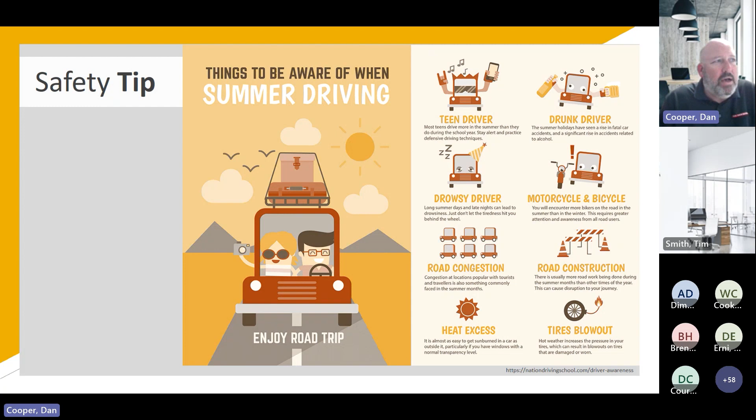Hey, good morning everyone. I'm going to share my screen. All right, I assume everyone can see my screen. Good.

Good morning everyone, I'm Soumya Balusu with SCS Engineers, and along with my colleague here, Shashank, we'll be talking to you about landfill closure. So a little brief intro for me and Shashank.

I'll let him go here in a second. I've been with SCS for about 6 years, and I've been in the solid waste industry for close to 18 years. A little fun fact about me is I practice the other side of my brain, separate from engineering. I've practiced Indian classical dance and performed since the age of 7.

I'll let Shashank go here with a little introduction, and I'll take back over. Hey, good morning everyone, I'm Shashank. I work out of the Atlanta office for SCS. I've been here for 5 years, 6+ years in solid waste. A little fun fact, I play soccer, I coach soccer for the past 2 years, and shout out to any Arsenal fans out there.

Going over our agenda here, I'll be doing the first couple of slides, and Shashank's going to do the bulk of the presentation. We'll go over closure, an overview, what triggers it, typical types of capping systems, and then we'll talk about what to plan for when designing a closure, some considerations for leachate and landfill gas as you prep for closure. Think about construction and bidding, material costs that are all over the place these days, and of course plan for contingencies. Then we'll wrap it all up in our conclusion slide in terms of the takeaways for the preparations for closure.

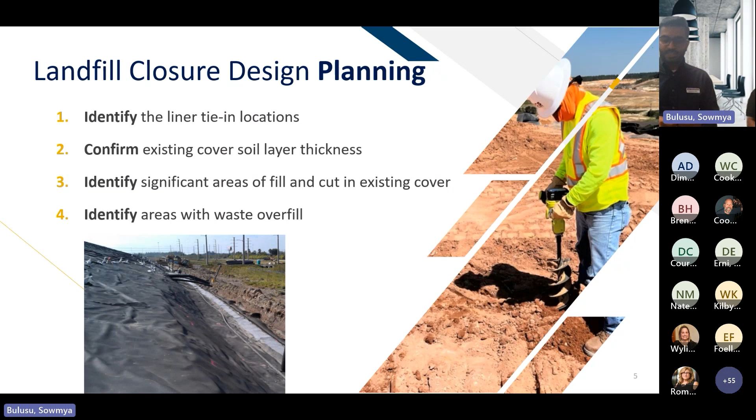Going on, leachate considerations. Being in the Southeast, none of us are immune from rain. Is this site a wet site? Identify and flag any existing leachate outbreaks. Make a plan of tackling those as part of your closure design, and then address them with multiple options out there: toe drains, French drains, or any vertical sumps you may have to look into incorporating in your design.

Stormwater considerations, that's the biggest challenge with closure, and we'll go more into the rainy season on that. Need to look into how much fill will be needed on your benches, evaluate slope on the benches so the stormwater design will work, and show more details on your stormwater outlets daylighting.

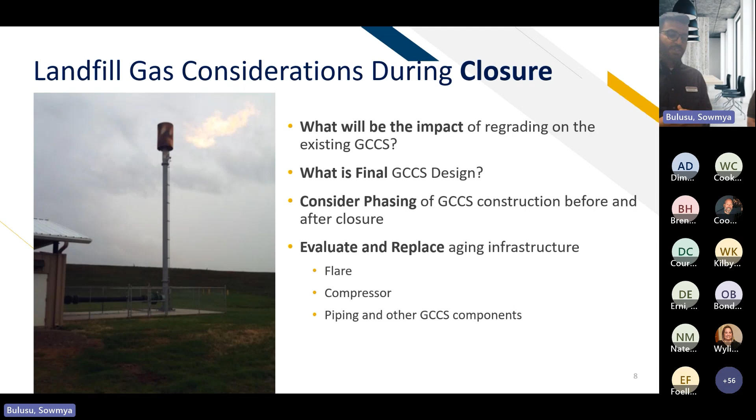So what would make sense is bidding during the rainy season, planning during the rainy season, so you don't have boots on ground, heavy equipment contractors sitting out there waiting to ride out the rain event, or reworking the slopes with soil washing down. So bid during rainy season, stage your construction more for the dry season.

Typically, we want to look at a 20-25 acre closure area to avoid interaction with the rainy season. And as I mentioned, during rainy season you can do all the initial legwork: shop drawing reviews, material procurement, conformance testing, and material delivery.

Material cost—obviously you're looking into closure. Cost is going to be the bigger driver here. Costs are ever changing, and material prices are rising each day. Geosynthetics have gone up by anywhere between 100 to 300% in the last year or so.

So a few things to evaluate in this situation. If you have enough time on hand, and the owner—whether it's the county or a private owner—wants to look into buying the material, what that would do is save you a 15 to 20% markup, which the contractor typically has. But if you're looking into that, you invite added responsibility on the owner side, which is getting the material, unloading it, and storing it in the right location. Geomembrane stores outside pretty well with some cover on it, but you may want to look into storage for geotextile and GCL, which are susceptible to moisture and UV.

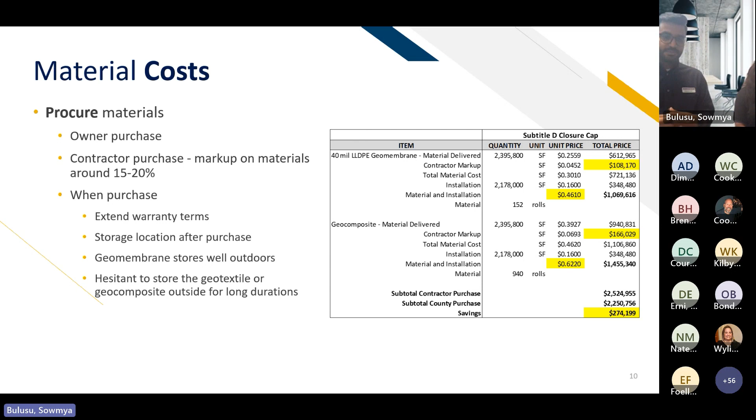Strategies for low bids: more definition in plans will always help. Having a more defined design with more details and call-outs, with exact locations either drawn out or in a tabular form of where you want your stormwater features or anything that specifically needs attention, means it doesn't need to be figured out during construction, because at that point things move too fast. Chances of failure are significant in those situations.

More breakdown in your bid forms—again, we don't want a 1,000 line item bid form, but breaking it down will help mitigate risk. And then contractor pre-qualification: while going through the design phase, you can work with purchasing to start pre-qualifying your contractor, so you don't have to worry about who you're dealing with when the bids come in.

Now, planning for contingencies. You can plan everything, but there will always be contingencies during these big major construction events—leachate outbreaks being one of them. With soil moving in, heavy equipment moving around, and waste consolidation, there will be spots with wet areas or leachate outbreaks, so have extra details in place for issues like that.

Raising your GCCS components—soil will be moved in before and after the liner, so you have multiple events where the stub-up will be at multiple heights. And if you have an ongoing monitoring schedule, you have to evaluate that to maintain compliance requirements as well as to keep the contractor moving.

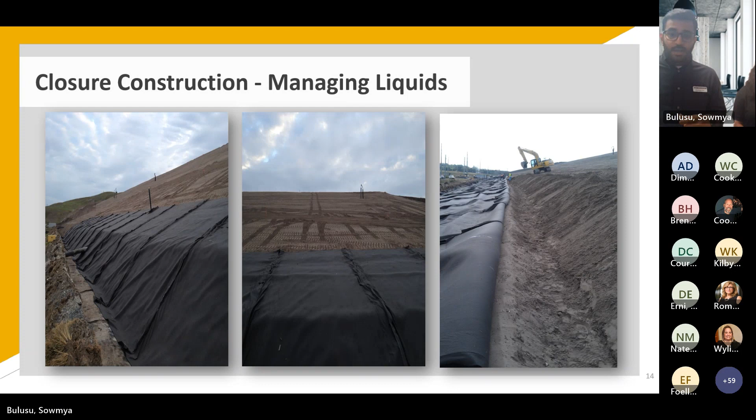In the next slide, on the left picture, the geocomposite was extended upslope because they identified a wet spot or continuous leachate outbreak—extending it further up gave the leachate a pathway to flow down to the low spot. On the right picture, you can see the excavator putting in a vertical stub-up, which can be used to install a pneumatic pump or other pumping mechanism to extract liquids and prevent them from accumulating at the toe of the slope.

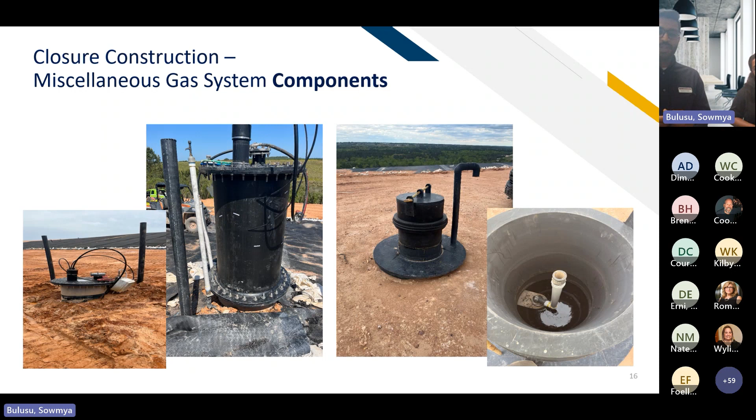And on the right, you can see an air release valve in a vault box, and rather than raising the entire component, they just decided to raise the stub up for that with a PVC pipe.

So overall, preparations for your closure, as we went through this presentation, thinking of closure, what can you do right now before you actually go into construction or in a design phase? Look into your tie-in locations, evaluate if you need to come up with what area you're looking for, for either a partial or a complete closure.

Your GCCS evaluation, evaluating your existing as well as your final needs, managing liquid outbreaks, soil cover depths to confirm that you're meeting your permit requirements.

And then talk to regulators. As we mentioned earlier, if you have areas of waste relocation or anything like that, see if the regulators are willing to look into a plan, or if not, then what are the other options? And then strategizing with your purchasing.

With that, we conclude our presentation.

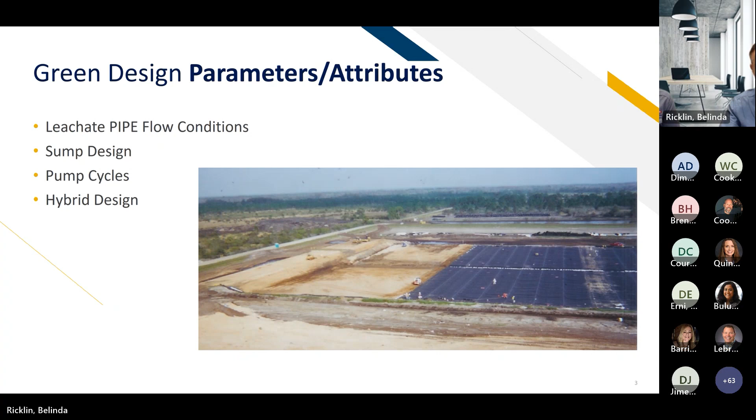Versus the slope, which will give us some ideas how to maximize the green design of the cell. Pipe flow condition in the green design: the pipe flows under submerged condition, which will provide the flow to be maximum within the pipe dimension, 8-inch. Usually we use 8-inch pipe.

In the herringbone design, the flow strictly flows by gravity, which provides much less flow capacity than the maximum that can be carried through the pipe. For example, if we have an 8-inch pipe at a slope of 0.35%, the maximum flow, or the full flow capacity of that pipe, is 470 gallons per minute.

Where does that come from? If we look at the Driscopipe design manual, it gives the capacity of the pipe, full flow capacity of the pipe, based on the slope. The x-axis here shows the slope of the pipe, and the y-axis is the dimension, diameter of the pipe. So if we look at roughly 0.35% slope of the pipe, the 8-inch pipe can give us about 470 gallons per minute.

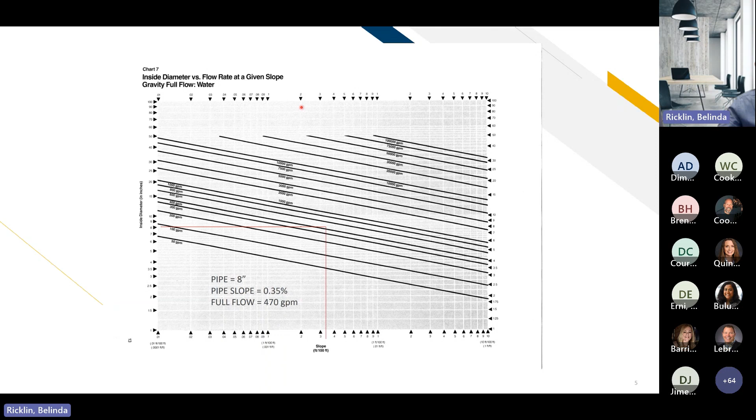Now, this is for water flows. I know we're dealing with leachate, which is different than water. However, this will give us an idea that we have much more capacity in the leachate collection pipe that we can utilize.

Now, where is the pipe located under the herringbone design or the green design? In the herringbone design, if you look at this chart, the leachate pipe is laid on a grade of 0.35% or 1% or whatever the grade is, and the invert of the pipe sits at the top of the sump.

So actually, it will be discharging into the sump by gravity until the sump fills up, then the leachate will be pumped out. In the green design, the leachate collection pipe invert sits at the invert of the sump. That gives us the sump and the trench where the pipe is located becoming like one big, large sump that we can utilize to store the leachate.

So basically, this is the difference between the two design considerations. Now, it's very important that we have good settlement analysis of the cell that we design. Geotechnical information and settlement is very critical, because when you design a green cell, you're really depending on the post-settlement grades, since this controls your grades, as we will see later in the chart, how that affects it.

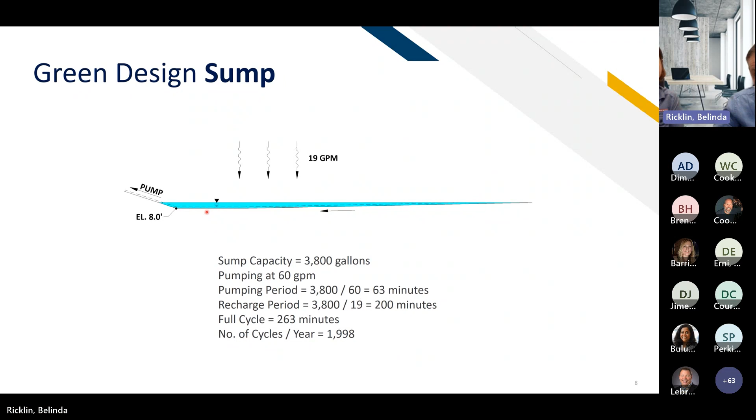So really, in summary, the herringbone design, the number of cycles per year that pumps coming on and off is about 11,680. Whereas in the green design, we have much longer cycles because of the volume of the leachate within the sump, so the cycles per year is much less, which is 1,998. Of course, this is quite a difference between the two scenarios, and this will help in reducing the maintenance cost of the pump and providing longer life for the pump. So actually, this is one of the advantages that you can get from the green design. Okay, Thomas.

Okay, so this is the fun part now. How can we determine how long our green cell design is going to be? And what are the controlling factors or parameters that we can evaluate to maximize the length of the cell?

So basically, if you look at this chart, we have the depth of the sump on the x-axis, and we have the slope of the pipe or the slope of the sump on the y-axis. As you can see, the lower the slope is, the longer the cell you're going to have. That's why post-settlement grade is very important, because 0.1% or 0.2% change in grade is going to make a difference under this design. So if we have, for instance, 0.35% slope, and we go on to design a cell 750 feet long, we know that we want to have a sump about 2.7 feet deep. That sump will have 2.7 feet deep at 0.35% post-settlement grade, giving us a length of the cell of 750.

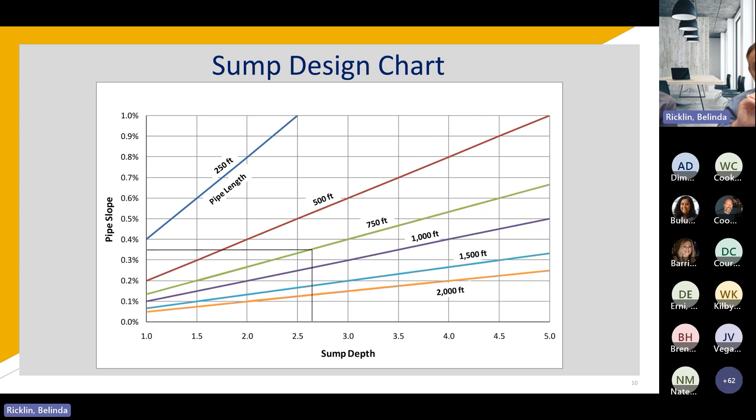So now I'll go into a few construction photos we have for cells that we've done. I think mostly through Florida, we've designed some cells like this.

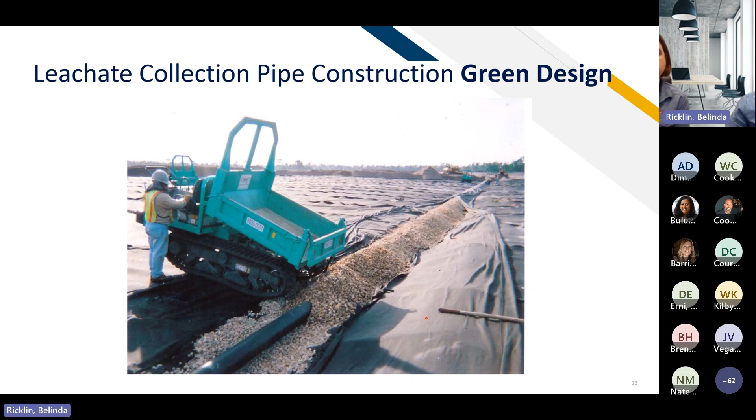To the benefits of the green design: one of the major benefits of this design is the increase in airspace compared to the herringbone design. You use a lot less structural fill to construct the cells, and a lot less fill to construct the berms around the cell, since you can have a constant elevation berm around this type of design.

This design also allows for lower head on the liner. You have a shorter calculation of the head, you can show that it is not as high with this design. And then you have your increase in the sump storage capacity that Abdul discussed, as you can see in this photo here.

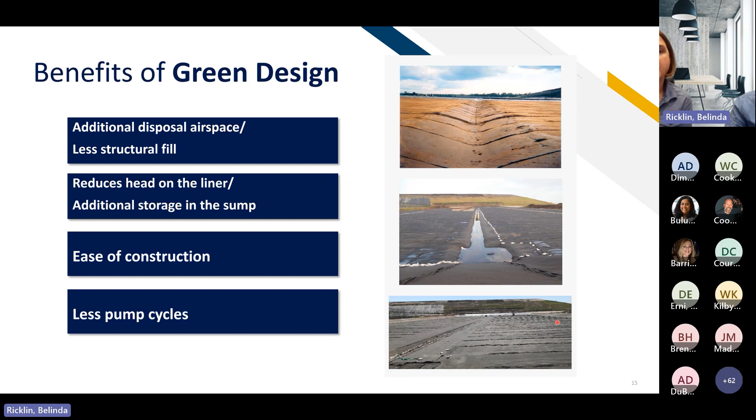And then, as Abdul shows, because of the sump capacity increase, you have less pump cycles. That extends the life of your leachate pumps, and then you can consider all the financial beneficial impacts of all these advantages. So with that, I'll take any questions.

So it looks like we got one in the chat here, so I'll go ahead and read it. It says: do you see any differences in the amount of leachate biogeochemical deposit in the LCS between the two designs?

I don't know who the question was directed to, but I don't think so. If the pumps are maintained and pumping the leachate frequently as designed, as long as the cycle is about one hour or two hour cycles, it's not going to make much difference. If it sits in the sump for a longer period of time, that will have the potential to precipitate some of the calcium carbonate—we're talking about days, maybe weeks. So if it's operating properly, I don't foresee any problem with that. But that's a valid point—if you have stagnant leachate for a long period of time, you have a large potential for creating calcium carbonate precipitate. I hope that answered the question.

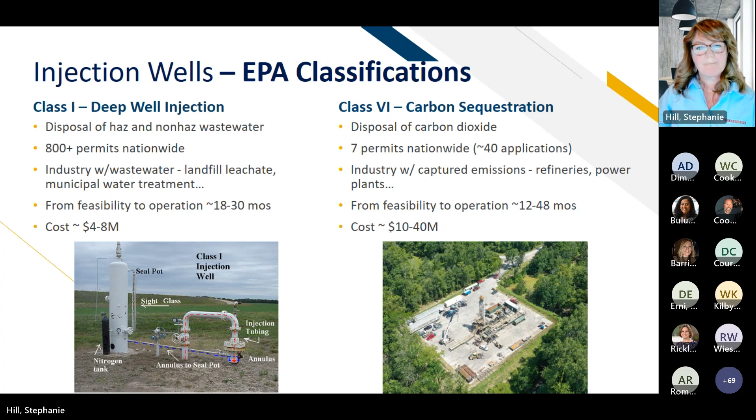Injection wells are designed to protect drinking water aquifers, and in a few minutes I'll show you how they do that. In both deep well injection and carbon sequestration projects, permanence creates certainty with operators, regulators, and communities. Permanent disposal of wastewater means it doesn't come back up; it's forever isolated from drinking water resources and surface streams. Permanent sequestration of carbon dioxide means it can't re-enter the atmosphere. Deep well injection is a residuals management option for industry seeking business certainty.

Treatment plants are tightening their belts and acceptance of certain waste streams that impact their UV filtration processes, so they're cutting off streams that contain emerging contaminants of concern. Use of deep well injection can eliminate those fluctuating treatment plant criteria and can represent significant cost savings to hauling wastewater off-site. Carbon sequestration reduces atmospheric emissions, allows high emission generating businesses to compete in global markets, and helps them reach ambitious carbon intensity goals.

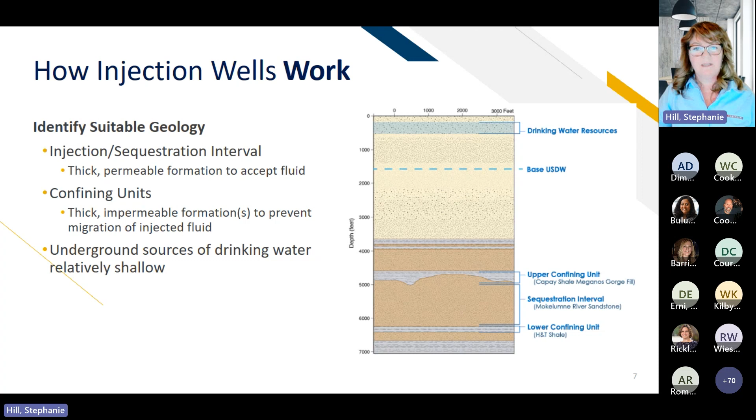And three, is there adequate vertical separation between the base of that protected drinking water aquifer and the top of the confining interval? So we're essentially looking for a confining unit or cap rock to keep those injected fluids down in the injected interval so they don't have some sort of artificial migration pathway to send that water up to the base of the underground source of drinking water.

So injection wells are installed with multiple strings of steel pipes or casing. Think of it as a set of nested toys, or a straw within a straw. Each string of steel casing is progressively smaller and it's cemented in place. This method of construction creates a redundant barrier between the injected fluid and the protected drinking water aquifers.

Requirements for continuous monitoring and frequent well tests ensure the well maintains integrity. When injection wells are sited in areas with suitable geology, when they're properly designed and installed, and when the monitoring, reporting, and testing plans are properly implemented, then injection wells can be a responsible water management option that effectively protects drinking water aquifers.

Deep well injection and carbon sequestration wells are very similar, but one difference is that deep well injection takes liquid fluid, while carbon sequestration can either take liquid fluid or supercritical fluid. I'll talk about that in just a moment.

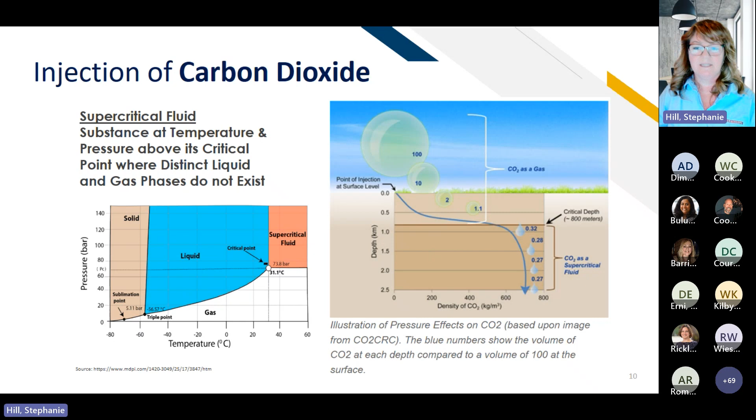So let's move to the illustration on the right now. By compressing the gas into a supercritical fluid, we effectively reduce the volume of the substance by 98%. And when we inject a supercritical fluid into a formation, we can get a lot more carbon dioxide into a smaller space.

So injection wells are installed using large drilling rigs capable of drilling through thick, competent rock and handling the anticipated weight of the steel casing.

Through a series of alternating sequences of drilling through rock, setting casing, and cementing the casing in place, two things are happening. One, of course, we're installing the injection well. And two, we're collecting site-specific data.

The data can come in the form of water samples to validate the pretreatment to ensure chemical compatibility, and rock cores to assess the pore size so we size our filtration media correctly and don't plug off the well. The last form is other geologic data to confirm appropriate set points of our casing within competent rock. Those drilling and completion activities typically take place within about 4 to 6 weeks for each well.

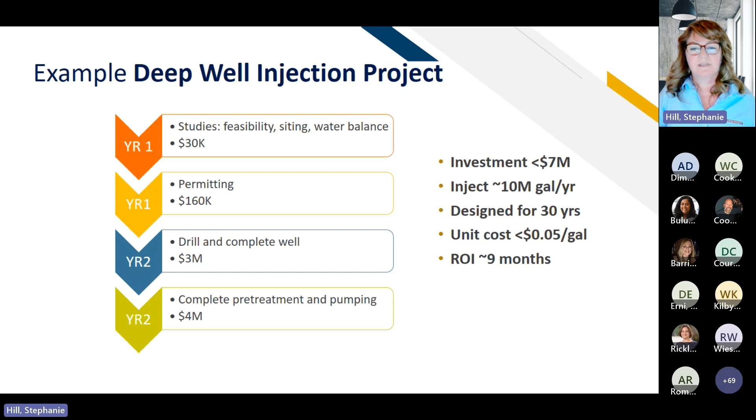That's before any sort of federal incentives offered through the Inflation Reduction Act of 2022. Although we may not have the leisure of a lot of time today to go through that, I'm happy to discuss things like the 45Q incentives, tax credits, and qualification requirements offline if you'd like to contact me.

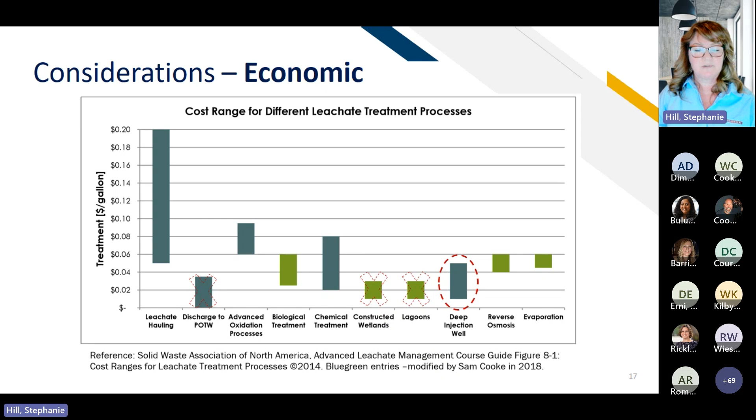So I'll provide a closing here to say that deep well technologies have been through decades of improvement, and they're strictly regulated, with redundant protective design components, continuous monitoring and testing. Injection wells are a responsible environmental management option, an EPA-supported option for permanent disposal with no residuals to have to manage. Isolating wastewater and carbon dioxide from the water we drink and the air we breathe serves to improve our environment. For businesses, use of injection well technologies provides certainty through elimination of varying water treatment requirements, and they also provide significant cost savings over hauling waste off-site.

So with that, I thank you for your time, and I think that we've got some time to answer questions before our break.

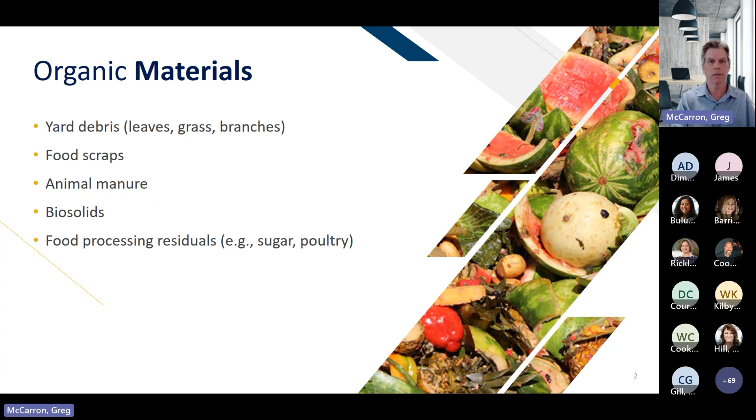The first step in any feasibility study, any look at options, is to understand what organic materials you need to manage. Here's a list of the common materials that are managed outside of a landfill or waste-to-energy facility—everything from yard debris to food scraps, biosolids, and food processing residuals of all kinds. I have a couple of examples here related to the sugar industry as well as the poultry industry. Later in this segment, Trent is going to do a deeper dive into a specific biosolids project, so I won't talk too much about biosolids. Most of what I'll talk about centers on yard debris and food scraps, but it really depends on your specific situation as to what organic materials you want to look at—not only the type of materials but also the quantity, how much material you need to manage.

Nationally, there's lots of activity with organics management, specifically diversion of food scraps from disposal—meaning from landfills and waste-to-energy facilities. The reason for that is largely regulatory driven. There are now 8 states that have some type of diversion regulation, and there are also another 7 or 8 large cities or large counties across the U.S. that have some type of diversion regulation on their own.

Just to give you some sense of what this means, California is probably the biggest one to note, in terms of their population and regulation. They've calculated that statewide they need to install about $150 to $300 million worth of capacity to handle organics. This is largely food scraps in the California regulatory scheme.

There's also lots of climate change initiatives, and organics diversion usually factors in quite heavily in what you can do to limit climate change and limit greenhouse gas emissions. And with that, there's also lots of money that's available and becoming available.

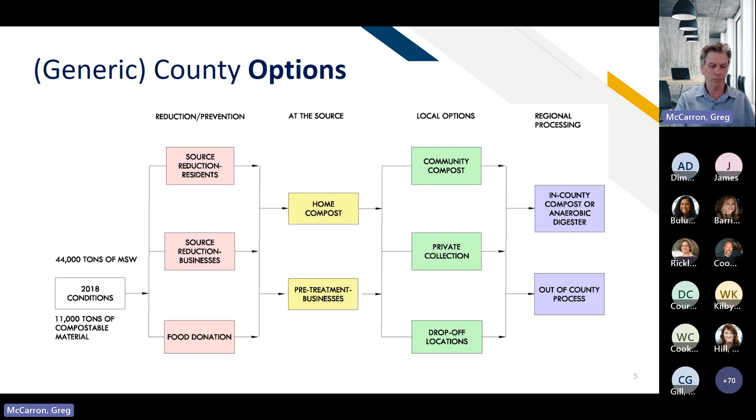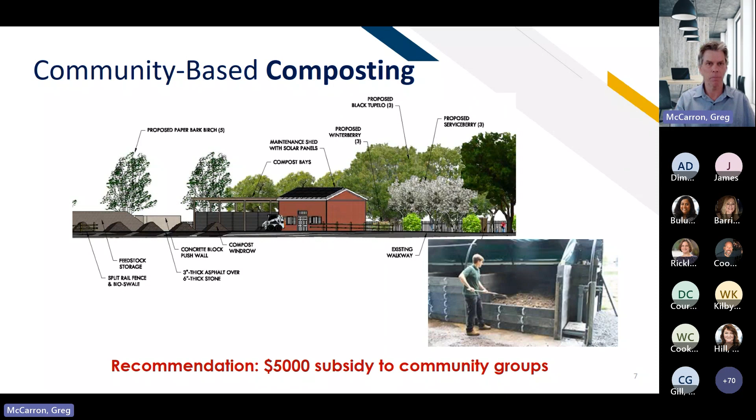On the right-hand side is St. John's University, also coincidentally in Queens, and this handles the food scraps from the university itself. Again, by way of example, in the county feasibility study we did, we suggested the county provide $5,000 subsidies to community groups if they were going to implement some type of community-based composting program.

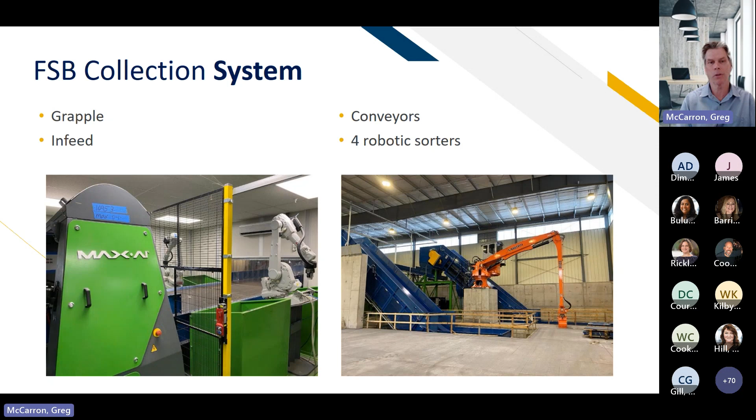So now moving off of collection and home and community-based composting, I wanted to get into more centralized facilities. So looking at compost technology, there's everything from turned windrows to aerated static piles to in-vessel or in-building systems.

What I like for process and cost efficiencies is actually a hybrid system. I'll show a couple of examples of those. That's where we're combining an ASP system at the front end, followed up with a turned windrow system.

So in all instances, before I jump into the actual photos of the facilities, there are common goals and common requirements for any kind of compost facility or anaerobic digestion facility. Number one, we need to make a high quality, consistent product. Number two, we need to comply with all regulations - typically the big ones are odor and air emissions, as well as water, contact water and stormwater.

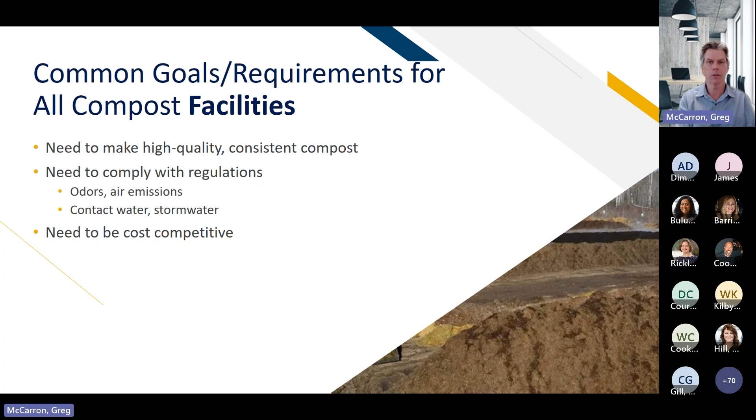And then finally, we need to be cost competitive. As much as folks want to divert organics and food scraps from landfill and waste-to-energy, we really need to be cost competitive, because often these evaluations come down to the literal bottom line, and we need to make sure we're designing and building these facilities to compete with landfill tip fees and waste-to-energy tip fees.

That's actually a piece of equipment that SCS owns. We purchased that about 10 years ago, so we've been operating that compost turner at this site and other sites in New England for the past 10 years.

Next up is a site in Florida. This is handling the sugar industry, and it's a large site that just opened up early last year. This site you see in the photo is about 36 acres in total. At the far end, if you can make that out, is their stormwater pond - that's about 9 acres of the 36 acres. So it's a big pond, a quarter of the site.

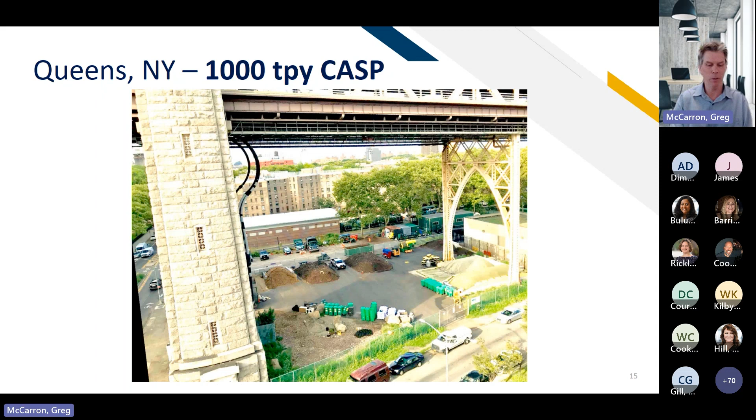So this facility, we did the civil site design here, and this is the other notable point: it's underneath the Queensboro Bridge. We did this design, and construction was done in 2016, 2017. It's been operating at this location for 6 to 7 years. In fact, prior to moving to this particular location on the bridge, it was at another location further up under the bridge, so it's been in place for close to 10 years, operating successfully with minimal odor and other impacts on the neighborhood.

Next up is a larger facility in Prince George's County, Maryland. This is now a 40,000 ton per year covered aerated static pile system, handling both leaf waste and food waste. This is using a Gore cover technology. As you can see in the foreground, there are 12 bunkers in total, 9 Gore cover systems. We designed this facility back in 2018, I believe, so it's been operating for about 5 years or so.

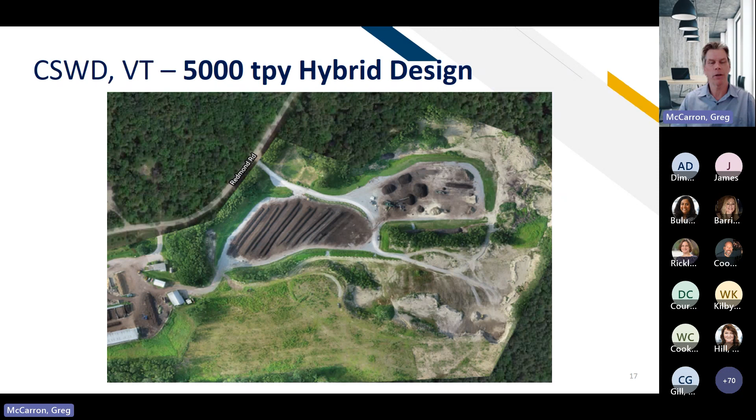Next is a facility that we helped out with some expansion and modifications to. This is a hybrid system, kind of the system that I like to see. On the left-hand side of the photo, which is largely cut off, is their ASP system. In the middle of the site is their windrow turning operation, so after the material goes through the ASP process for about 4 weeks, it comes out and goes through open windrow turning. On the right-hand side of the photo is their screening, sales, and blending operation. This is a site in Vermont, up in the Burlington, Vermont area, which can handle 5,000 tons per year of food scraps.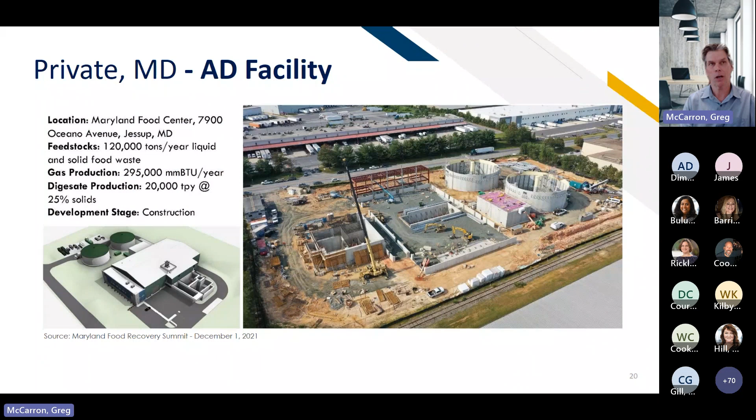So with that, thank you, and I'll open it up for questions at this point in time.

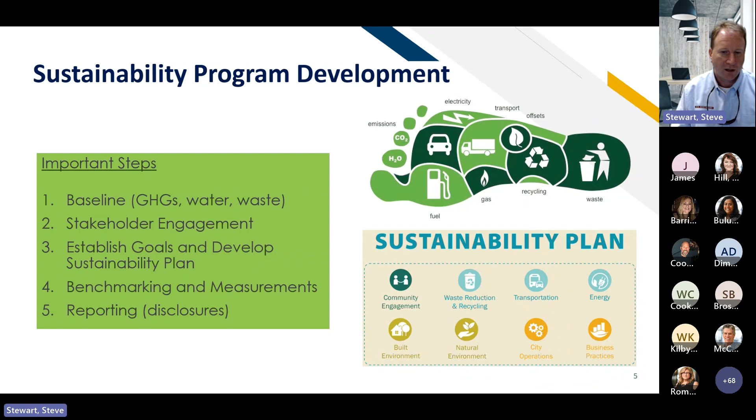So a couple of, getting down another layer a little bit into the details, here's a couple of examples of some projects that actually lead to sustainability, because I hear there's a lot of talk about sustainability, but you may not hear some real specific examples of what companies are doing.

In a lot of cases, it's necessary to do some sub-metering to better understand your consumption, if you've got multiple processes, departments, or campuses. You typically have your utility meters out at the street, so to speak, but sometimes you need internal sub-metering. There are ways to do that that are not intrusive at all, and can even be temporary monitoring and measuring equipment to establish your baseline, or to periodically check how your performance is.

Energy audits are also a good activity if you have significant electricity consumption. Even without metering, there are audits that can identify energy efficiency measures based on the type of equipment—looking at the nameplate, the models of the equipment, how it's being operated—there are reasonable estimations of how much energy is being consumed, and how to operate that equipment more efficiently.

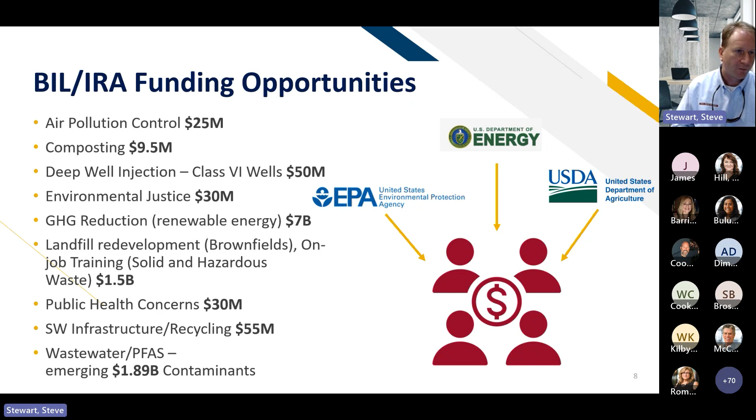There's been other options out there. These are some of the areas that we help in, and we recently added a grant writer to our team to help look at these opportunities. So if you have any questions, or feel like there might be something here, or even want to find out more information about funding that's out there, we can assist with that.

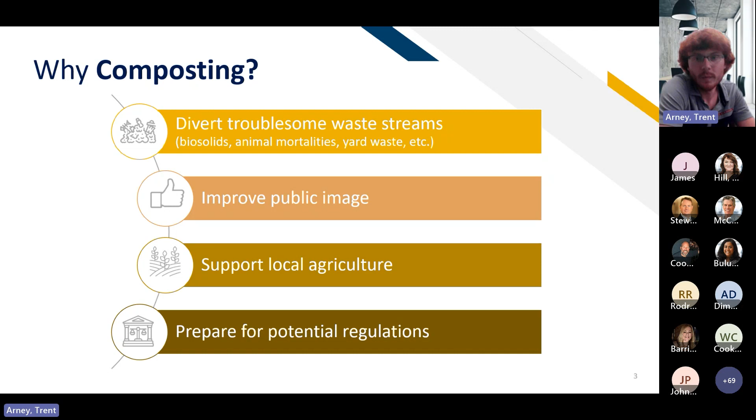So now we're going to zoom into Hillsborough County. We're going to rewind to 2014. They're looking at the population growth curves and see the writing on the wall. Population is growing rapidly and not showing any signs of slowing down. So they need to figure out ways to sustain the current and future population, and also ways to help conserve airspace and save money, because they know this is going to be a challenge in the future. And they were right.

Hillsborough County is currently the fastest growing county in the entire state of Florida, so they were right to be concerned. Armed with this knowledge, they started to discuss options. One option that came up was, like I said earlier, we have yard waste, we have biosolids, we can combine the two and make compost. They spent over $2 million trying to dispose of the biosolids, mostly in landfills. It's very expensive and challenging.

So with that in mind, they decided to move forward with a pilot scale test. They wanted a proof of concept, and to be responsible to the taxpayers while trying this new idea. So they started looking at where they could site this new composting facility. They said, hey, we have this landfill cell we haven't been filling for a while and don't plan to fill in the near future. It's a perfect opportunity. So they designed this pilot scale test to operate on top of the existing landfill cell.

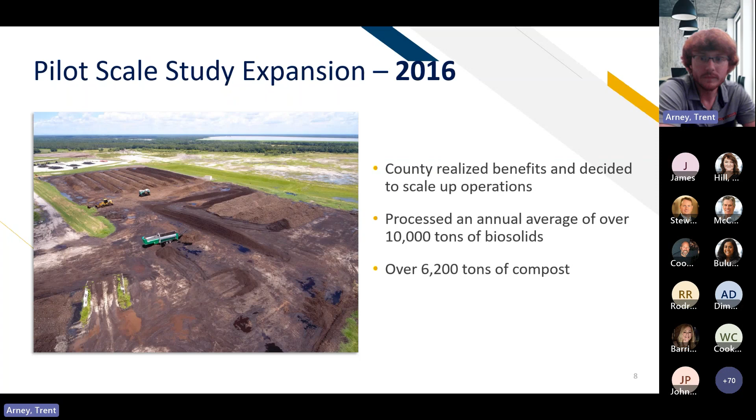So let's touch on that equipment a little bit. Some of the composting equipment can be a little specialized. I know Greg mentioned the compost turner, it's a Komptech compost turner. This one is actually owned and operated by the county.

And it does exactly what it says it does. It's a little bit of a one-trick pony, and it is absolutely not necessary for a successful composting operation. It exists solely to make the process more efficient and a little bit easier on the operators, but it's absolutely not necessary. You can accomplish a similar effect by using a loader to turn your pile. It might take a little bit longer, but it's absolutely doable.

Another important piece of technology is the compost screener. What this does is take that mixed particle size you get at the end of a finished compost, and screens it to a uniform size that's a lot easier to use for agricultural applications. It's a more desirable product, sells for a higher price, and it's just all around better to screen that if you can. Then you can take the larger particles and mix them back into your operation and keep those going.

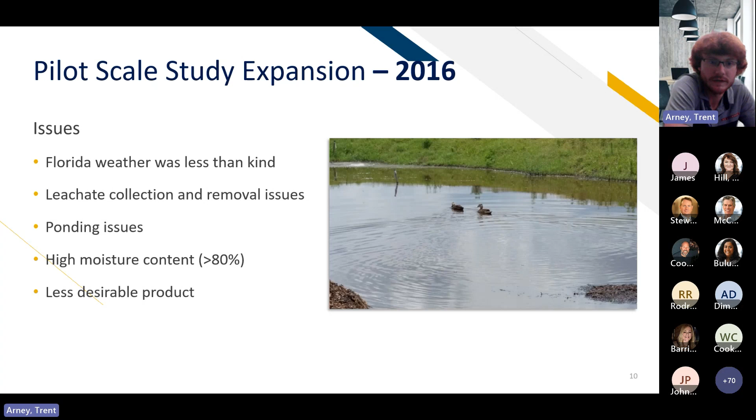So it's great, everything was going great, but for those of you who are aware of Florida's climate, we have what's called a rainy season. It's essentially a monsoon season, and the weather was less than kind to us that summer. The summer of 2016, we got a lot of rainfall. So we experienced rapid leachate collection and removal issues, ponding issues, and high moisture content. A compost pile is essentially a giant sponge. It'll absorb almost all the available moisture that it can, so it's just soaking up all of this rainwater. This leads to a little bit of a less desirable product in some cases and can cause some operational challenges to overcome.

Here you can see one of the operators overcoming one of those challenges. After a heavy rain, that compost, at 80% moisture content, would start to gum up the screen. So they would have to sit out there with a pressure washer and pressure wash it off. This is one of the reasons I like to suggest a pilot scale test first: you learn about all of these operational challenges and you learn ways to overcome them. You learn what you do want, and you also learn that in Florida, sometimes it's best to cover it.

So with a full-scale facility in 2018, following the enormous success overall of the pilot scale system, they approved the new facility at over 3 acres. This would be the largest composting facility in Florida under a single roof. This new facility is capable of processing 30,000 tons of biosolids per year, producing over 12,500 tons of finished product, and all of this product is pre-sold to support local agriculture.

I feel like I should mention the process used in this composting because it is not actually one that Greg touched on in his presentation. This one typically will fall in the other category when you're looking at composting methodology. It uses what's called a modified static aerated pile. What that entails is you do the normal composting windrow and sprinkle an inoculant on top of the pile. This contains a lot of healthy active microbes, and what this does is jump start that composting process. The county has had enormous success with that so far.

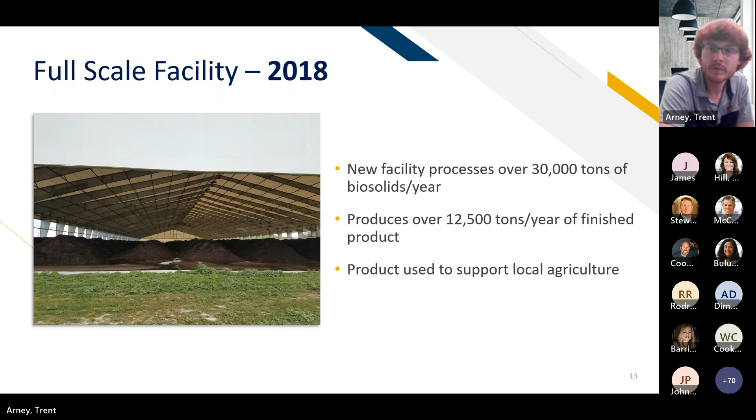Some of the improvements made for the full-scale facility: as I mentioned, leachate collection can be an issue with composting facilities, especially in the state of Florida. So there was a whole new leachate collection, drain, and storage tank system to make that a lot easier on them. Now it collects all the leachate that drains through the pad, stores it in the tank so it can be trucked off as needed. This way, you eliminate the ponding issues and you can easily help control your moisture content in the piles.

So this facility is very successful. It's won many awards: the 2021 American Public Works Association Project of the Year Award, and the 2022 Hillsborough County Planning Commission Outstanding Contribution to the Community Award, which is a bit of a mouthful and makes a terrible acronym. It's also a recipient of the Seal of Testing Assurance, a certified compost. This is a pretty prestigious program that the United States Composting Council puts on, and it shows that it's a very biologically stable and nutrient-rich compost.

This represents a huge cost savings for Hillsborough County, saving them over $1.2 million each year. This is a huge cost savings for any municipality, because biosolids are typically pretty expensive to dispose of. We could increase this to over $2.4 million after the expansion, which, following the trend you'll notice in this presentation, shows that they liked what was happening, so they asked SCS to design a new facility.

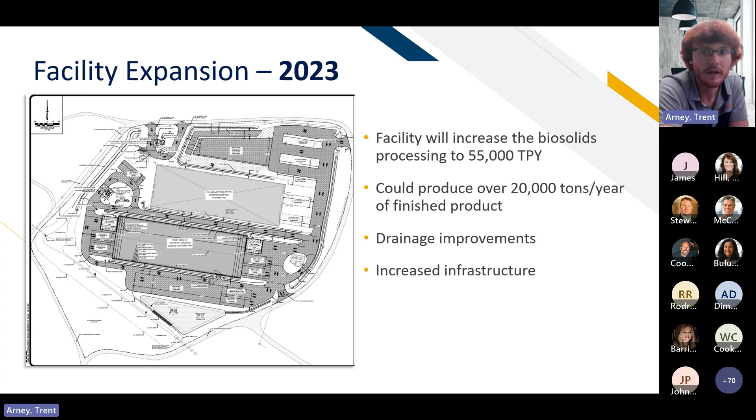Due to some rising concerns with biosolids and PFAS, this facility was designed with dual receiving areas in case food waste is added to the system. We wanted to make it easy to retrofit if needed, so we can keep that food waste separate from the biosolids. With that in mind, the county did ask us to design a conceptual food waste addition to the proposed expansion, and in doing that we encountered many challenges in removing the food waste from the waste stream—issues of city versus county ordinances, and complex challenges with collections infrastructure.

This is another great reason we like to recommend a feasibility study, because you will definitely run into these challenges before you start a full-scale facility. I think some people make the mistake of building their facility and then trying to source the material, and that can represent a pretty large challenge. We ultimately used this design to apply for the SWIFR grant through the EPA.

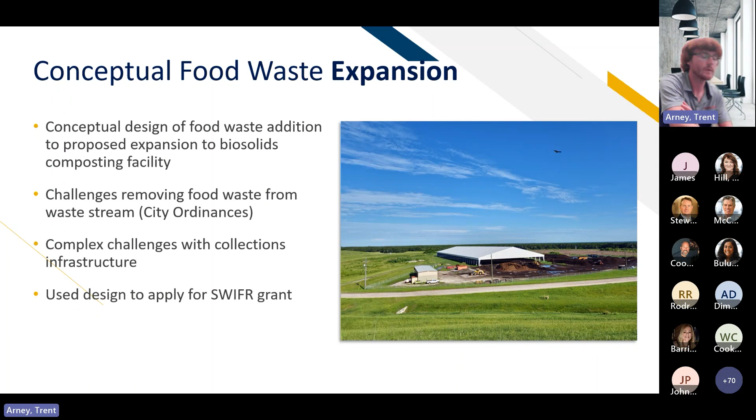So this is just a rough look at what we did. We basically took the last 100 feet of that new expansion building and decided to put in gore-covered aerated static pile technology, with the potential to process around 10,000 tons per year, producing around 10,000 tons per year of finished product. The plan was to use this product to support disadvantaged communities.

So you've seen the success of Hillsborough County's composting facility, and maybe you're interested in starting your own. What are some implementation steps? What can you do to get this process started? I recommend reaching out to your local regulators and local food waste producers, and assess your collection potential—see what issues you might run into with ordinances, collections, and infrastructure.

Reach out to members of the United States Composting Council, including local USCC chapters, as well as other state groups. It's a wealth of knowledge—these people are very knowledgeable, they've been in the industry for quite a long time, and they'd be happy to point you in the right direction. We're always happy to see new people join.

Conduct a pilot scale test or feasibility study. As I said before, it's very important to start small and slowly scale your production to match your feedstocks and market. The most successful composting facility, producing amazing compost, is going to fail if nobody is there to buy it. So it's important to do the pilot scale test to get a feel for your market. As Greg mentioned, we'd be happy to assist you with a pilot test or feasibility study if you're interested—feel free to reach out to any of us, and we'd be happy to get you started.

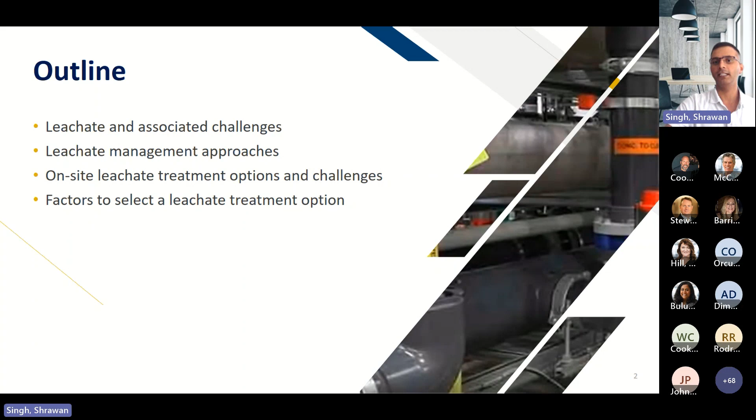Leachate primarily results from rainwater percolating through the waste, and a small amount is also generated from liquid originally present in the waste during decomposition or during the waste compaction process. We remove the leachate through the leachate collection and removal system, and some of the leachate we also remove from gas collection wells.

We remove the leachate to protect human health and the environment. That is the primary goal of all the things that we do as an environmental engineer. The other reasons are to protect landfill slopes, avoid seeps from the slope, to improve gas collection, and to keep the landfill compliant, which protects human health and the environment from the landfill.

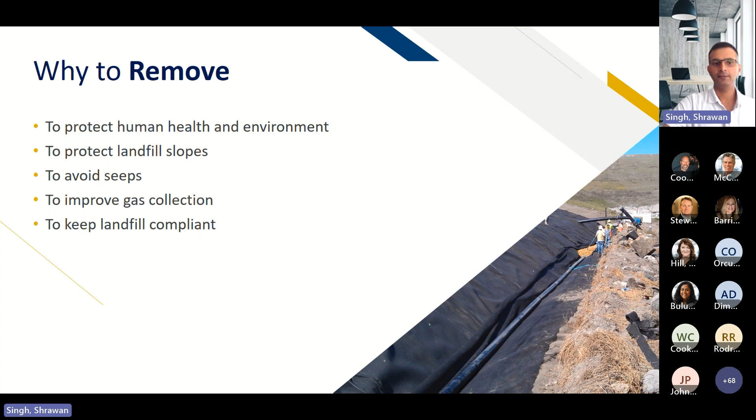Then there is on-site treatment. Some landfills have installed on-site leachate treatment options, and there are more proactive operators who, if they don't have on-site treatment options, are at least inquiring about what options are available for them. The other option is management within the landfill, like leachate recirculation, or you can solidify leachate and put it back into the landfill.

Landfills mostly on the west coast, where there isn't much rainfall, in several cases are evaporating leachate in ponds or spraying it over the active area. So although offsite treatment is the most common option that we have at the moment, it is gradually becoming more and more challenging.

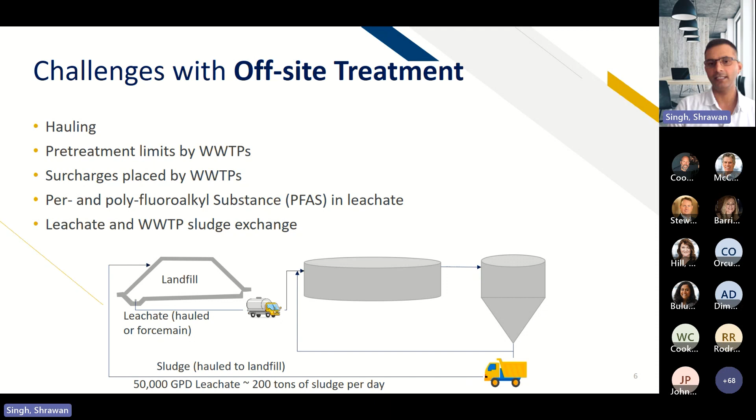Because of these reasons, more and more landfills are trying to evaluate on-site leachate treatment options. But if you want to treat the leachate or identify options for treating it, you want to first find out what you have in the leachate.

Typically, leachate is a mix of organic matter, inorganic ions, nutrients, and some trace compounds. The organic matter is primarily fatty acids, volatile fatty acids, and some humic and fulvic type compounds. The dark brown color you see in leachate is mostly because of these humic and fulvic type compounds. They are recalcitrant and harder to degrade biologically, which is why wastewater treatment plants sometimes ask for color measurement. This organic matter is typically measured using BOD, COD, or total organic carbon.

The other thing leachate contains is inorganic ions: some heavy metals, sodium, chloride, carbonate, and sulfates, which you can broadly measure as total dissolved solids, hardness, and alkalinity.

Nutrients are also present, mostly in high concentration ammonia, which is one of the key parameters that wastewater treatment plants look for, and that typically is high concentrations of ammonia present in leachate. At the moment, if we plan to install a leachate treatment system, or planning for even a feasibility of having one, we need to think about PFAS and whether any treatment system we are trying to install will be capable of treating PFAS.

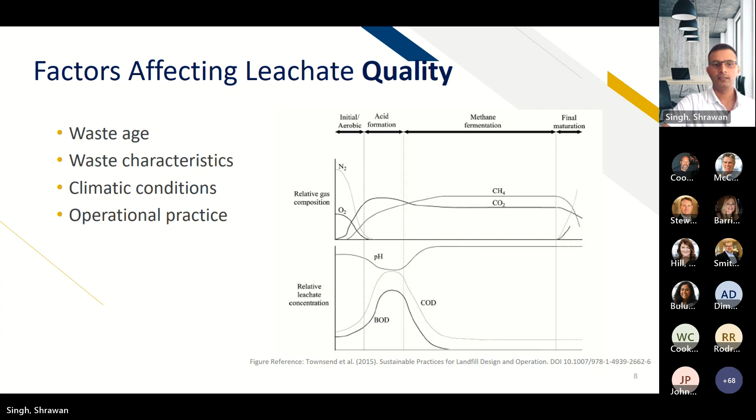Another key parameter is the ratio of BOD to COD, which in older leachate becomes less than 0.1. That means the biodegradable content is really, really small in the leachate. That's why wastewater treatment plants are typically not able to handle the organic matter we send from landfills through leachate. That's why mostly the treatment at wastewater treatment plants is because of dilution, not treatment as such.

In a typical MSW landfill, ammonia concentrations go down with age, however they are still high for biological treatment systems of wastewater treatment plants. As for PFAS, the variation with age is still up in the air, and we are still figuring out where we stand on that.

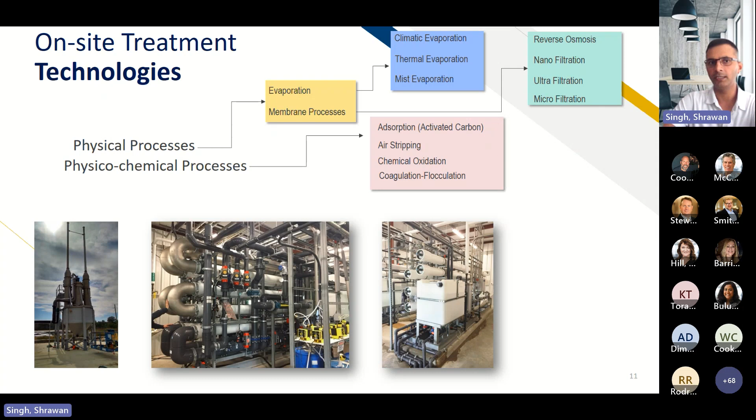Among other physical-chemical processes such as adsorption, air stripping, and chemical oxidation, these are again target specific or compound specific. Adsorption with activated carbon has shown significant promise with respect to removing PFAS, but cost is still a factor for that.

Other processes, recirculation has been used as a leachate management strategy to accelerate waste degradation. However, landfills cannot recirculate leachate forever, and at some point it will have to be removed from the landfill, especially in landfills in high precipitation zones such as ours.

Deep well injection, Stephanie has touched a lot on it. Several landfills are using it, especially in Florida, but site geology is one of the key factors in determining its suitability. As Stephanie was mentioning, it is one of the more recommended approaches for PFAS disposal by EPA.

So now in today's day and age, any leachate discussion without specifically discussing PFAS treatment is incomplete. So I wanted to give a little bit of information about what type of treatment technologies are used or have shown promise in removing, treating, or reducing PFAS from leachate.

PFAS, which everyone knows we call forever chemicals, is present everywhere and is harder to degrade biologically due to its strong carbon-fluorine bond. Among the treatment processes, reverse osmosis and nanofiltration have shown greater effectiveness in separating out PFAS. And again, as I was mentioning before, the concentrate disposal is a challenge.

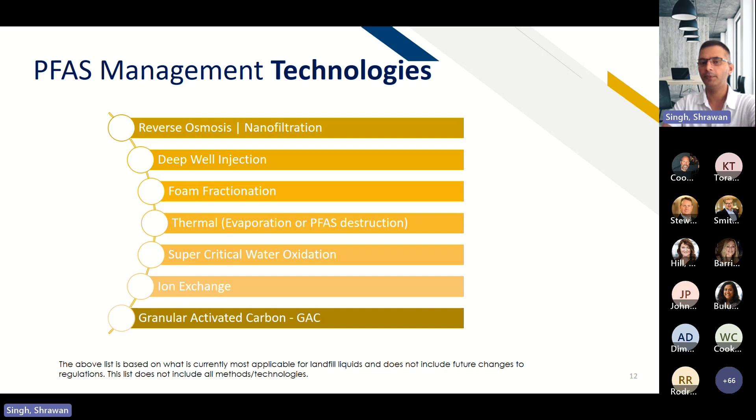But overall, the challenges with on-site treatment are, one, the footprint requirement—especially if you are planning for some biological processes, they may require a larger footprint as compared to some physical and physicochemical processes.

Then selecting a treatment process is challenging due to site-specific leachate characteristics, and these characteristics are dynamic. So it requires a skilled operator to proactively maintain the treatment system, considering this variable leachate. And at the moment, it is harder to find skilled operators, so that's another challenge for operating an on-site treatment option.

I was involved with one landfill that had a leachate pretreatment aeration pond, and at some point they had to move on—they could not operate it long term. They moved from hauling leachate to recirculation, and then at the end they settled on a reverse osmosis system.

Now, a few things to consider when we want to select a treatment process, especially an on-site leachate treatment process: what is our current disposal option, and what kind of future challenges do we see, such as PFAS, or your wastewater treatment plant saying they will not be taking the leachate in the future.

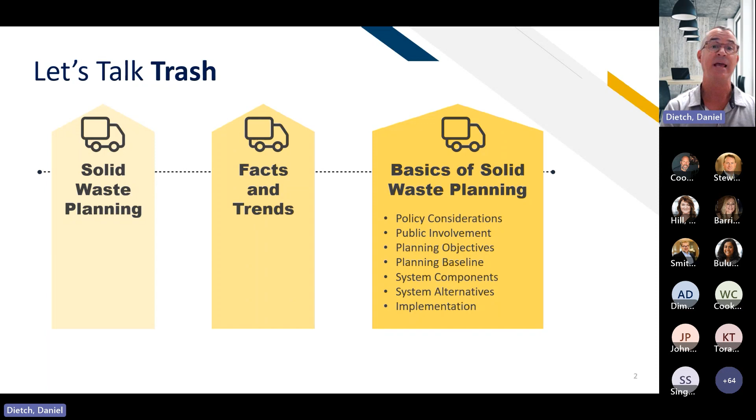Now, of course, the best thing we can do is not create waste in the first place, but I'm not so naive to think that that is easily accomplished. But to effectively manage solid waste beyond developing an integrated solid waste management system is the need and the ability to change human behaviors through thoughtful public policies. And this is where an effective solid waste plan comes into play.

So solid waste generation is correlated to the economy and affluence, and as you can see, we've enjoyed both over the last 60 years. Going back to 1960, each person in the United States generated on average a little bit more than 2.5 pounds per person per day. Fast forward to 2018, the latest data published by the EPA, and we're approaching 5 pounds per capita per day. That is pretty significant.

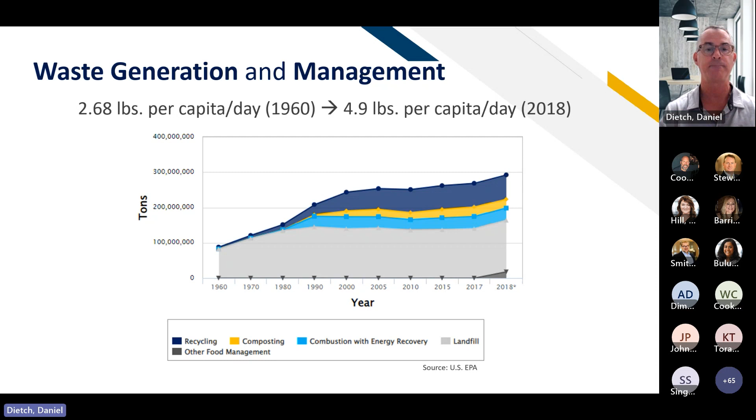In terms of markets for the waste stream components or commodities, the once robust global commodity markets are shifting dramatically, and that's having a real impact on municipal recycling programs as well as on their contracted service providers. Most significantly, it's China's National Sword policy, put into place in 2018, that really changed the global markets. When they started to clamp down on the importing of what was essentially contaminated recyclables, a lot of that capacity was picked up by countries in Southeast Asia and India, but they quickly realized they were receiving a lot of waste with the recyclable products, so even those options became less and less available.

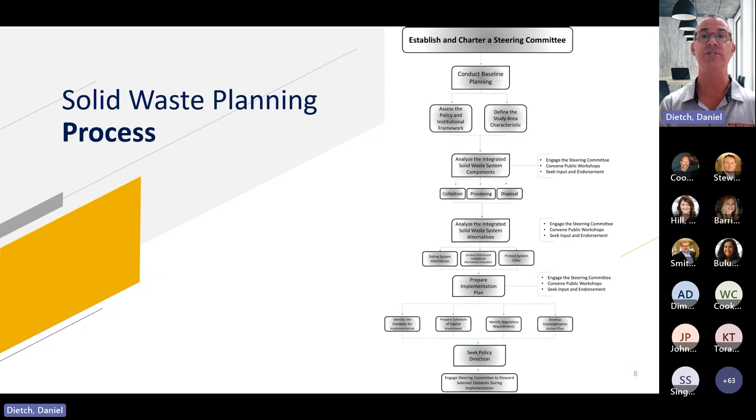Again, another touch point for the steering committee, but you want to identify the elements for implementation. You want to prepare a schedule of capital investment. You want to identify regulatory requirements and then develop an implementation action plan. Once you've done all that, then you can seek policy direction.

As I've mentioned a few times, public involvement is critically important, and I would consider this a critical success factor. But it's not sufficient just to check the box. It must be transparent and inclusive.

In terms of transparency, the information sharing must be complete, honest, and straightforward. The interaction should be structured such that each participant contributes value to the process, where it builds trust and cooperation across the stakeholders and facilitates results that best meets the community's needs.

It should also be inclusive. The impacted stakeholder groups should be represented in the planning process, really because this can minimize friction in the later stages of the planning process when challenges and directional changes can be expensive and disruptive.

And as I've also touched upon, the engagement should be frequent, should be routine, and conducted at key decision stages to ensure that stakeholders are heard, and it minimizes corrective actions and rework.

Now, just to give a little bit more flavor to establishing a steering committee, it's best to convene one before performing any analysis. It should be large, but not too large. You should secure member commitment, which can also often be facilitated through a chartering session where you can create a common vision, agree on the operating guidelines, and establish short and long-term goals for that committee. You can also use that time to establish guiding principles, and it can ultimately be memorialized in a chartering document.

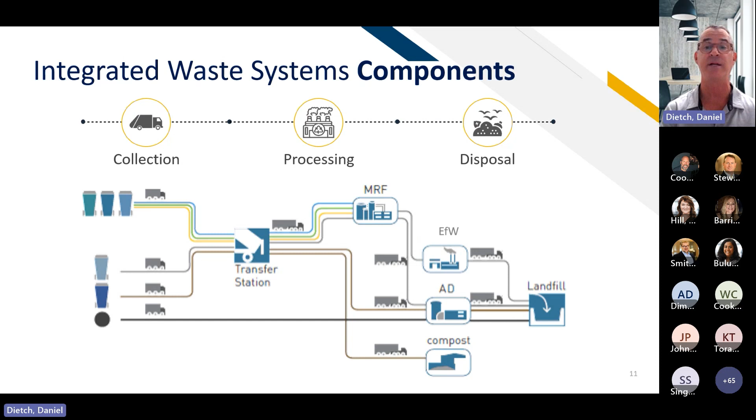And while there's a lot of talk about emerging technologies from gasification to plasma pyrolysis, they're all interesting and exciting, but please remember that there are no commercially operating facilities in the United States. Therefore, I suggest that a greater emphasis should be placed on proven commercially available technologies, but keep your eye on the horizon, especially with those conversion technologies and material processing facilities, as artificial intelligence and machine learning are showing great promise.

So once you have developed those alternatives, it's important to look at it in terms of capital and operational costs, of the alignment of the alternatives, and other considerations like the required education and training, matters like container screening that do affect quality of life and business operations, extended producer responsibilities becoming more and more important in our business, and as well as the resources required for compliance and monitoring.

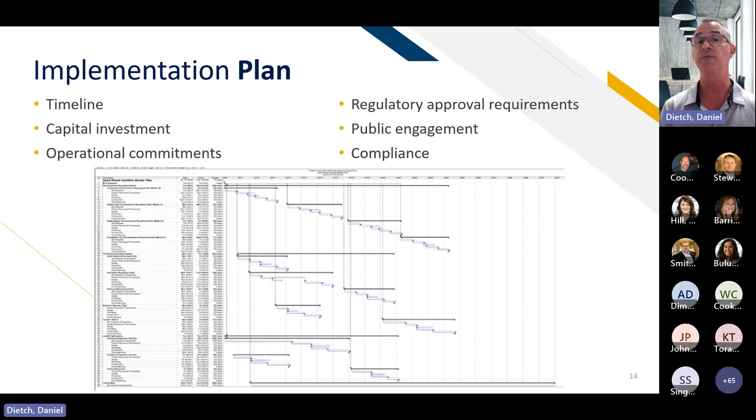Then it's necessary to have an implementation plan that considers the overall timeline tied to that, the capital investment, the operational commitments, the regulatory approval requirements, the public engagement components, as well as compliance.

And then if you're in the municipal context, it's critical. This is where the rubber meets the road. You have to tell your story to gain the acceptance of the elected body. So it's important to frame the opportunity, articulate the value, make it actionable, seek policy direction. And this is where that steering committee comes back into play, because they can then become advocates for the process and then also talk about the education and compliance requirements.

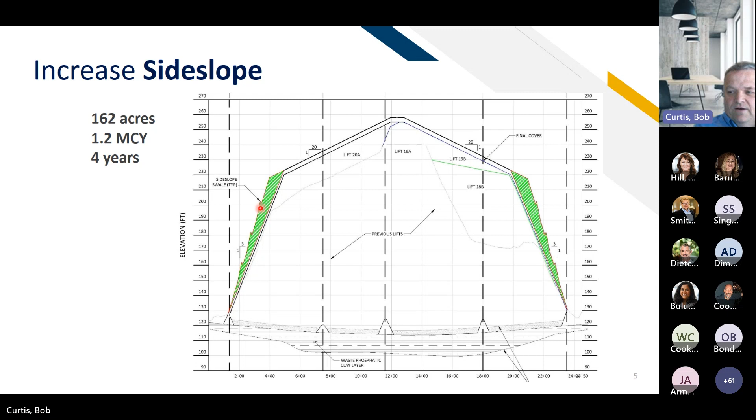The next option to look at would be to eliminate side slope terraces. 30 years ago, when I first started designing landfills, it was normal practice to go up 30 feet, and every vertical 30 feet you would have a terrace of 20 feet or so. So you would be designing those terraces in the waste. In this case, we're going to look at filling in the terraces and putting on tack-on berms.

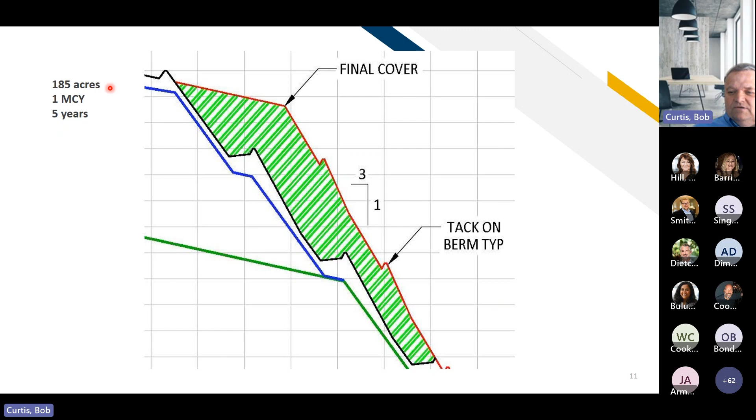Next option would be to piggyback. If you have area beside your landfill, beside an old Subtitle D landfill, you could expand horizontally by installing a new landfill beside it. But in order to gain more airspace, you would piggyback onto the side of the old landfill by putting a geomembrane or liner system up the side of that slope.

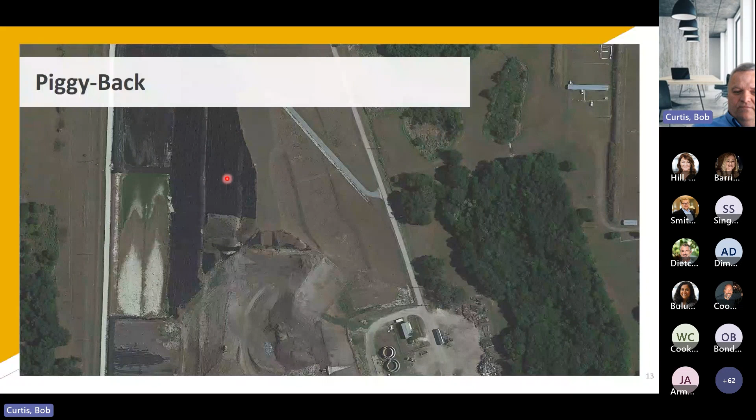Another view trying to capture the horizontal extents. You can see the base liner, then the side slope liner. Something they did here is put a rain tarp along that old landfill, along the piggyback portion, to shed clean stormwater so they wouldn't have to treat it as leachate. As they fill, they remove the rain tarp.

Also, I'm going to zoom in a little bit. They only went up a certain extent on the old landfill because they knew that if they put the liner all the way to the top, it wouldn't be covered for a long time, probably 10 years, and they didn't want that exposed to the environment. They also didn't want the added cost of constructing that additional liner system. Eventually, they will extend the liner up the slope.

This landfill is also looking at doing a vertical expansion over the old landfill. Some of the keys there are to make sure it's politically and publicly accepted to go vertical on your landfill. Again, you have to look at slope stability, political pressures, and stormwater. I know some landfills are restricted by deed not to go over a certain height, but others have that availability.

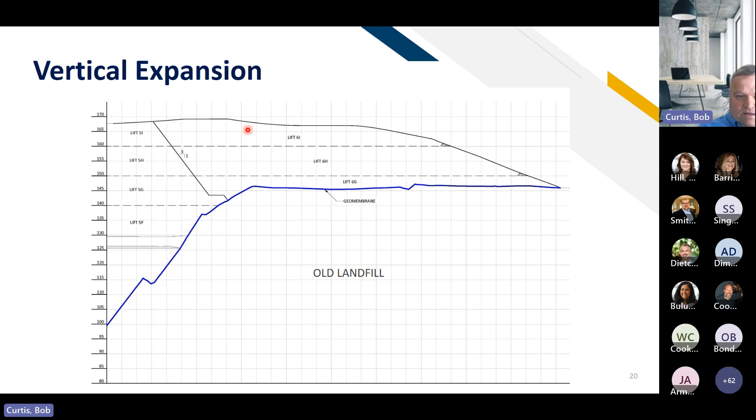And here's a cross section. This landfill, by going vertically another 30 feet, will add 900,000 cubic yards, or an additional 4 years.

Something else to consider is doing horizontal expansions by removing infrastructure. Basically, you move the infrastructure to another part of the site and utilize the space right near your existing landfill. Or you purchase adjacent land or mitigate wetland.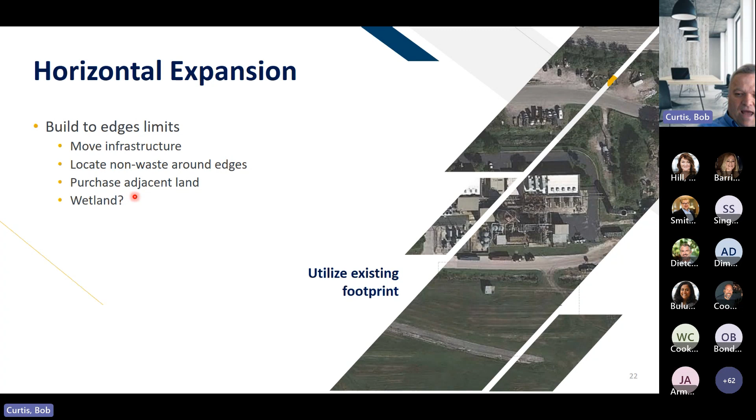The next example is in southern Florida, where this is happening now, or has been happening. This is the landfill now, and you can see a lot of neighborhoods around it, a lot of industrial work, but they've been working to maximize their horizontal footprint. Here are the cells, you can see they've put in a lot of cells at this place, but it all started with an unlined landfill.

And then they constructed the lined portions, or new cells, to the south. In the process, they had to relocate some electrical lines, and then they would piggyback with a new liner on the old cell.

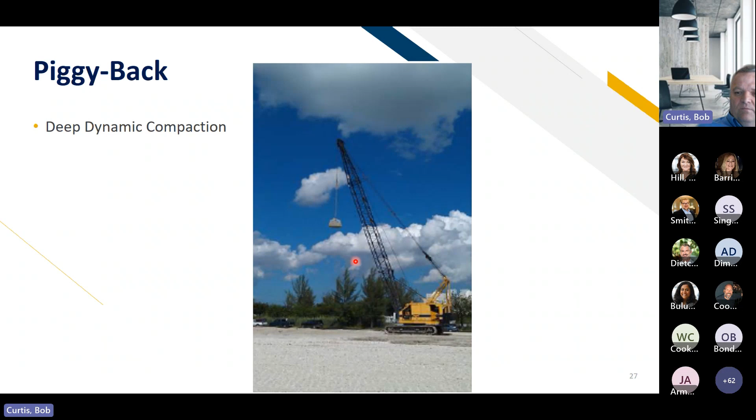At that time, they also utilized some deep dynamic compaction of the old waste to gain more space. This shows the crane with the weight to drop and do the deep dynamic compaction. Basically, by doing this, you're compacting the old waste, given the fact that 30 years ago, the compaction equipment wasn't as efficient or effective.

So at the same landfill, they then have been moving to expand to the north and to the east. They purchased two properties, one of which was an auto junkyard, which they removed the junk from, and the second was a lake, which they filled with borrow. They found it more feasible to do these than to find a new landfill.

And then they removed some additional electrical power lines and towers along this easement to gain another sliver of space.

They also relocated buildings and a scale house on the north side to add some new cells, as well as some tanks. And then finally, now they're looking at relocating an existing gas to energy plant. Space is so important and critical that they are going to move this entire plant to some other location in order to have a place to place their waste.

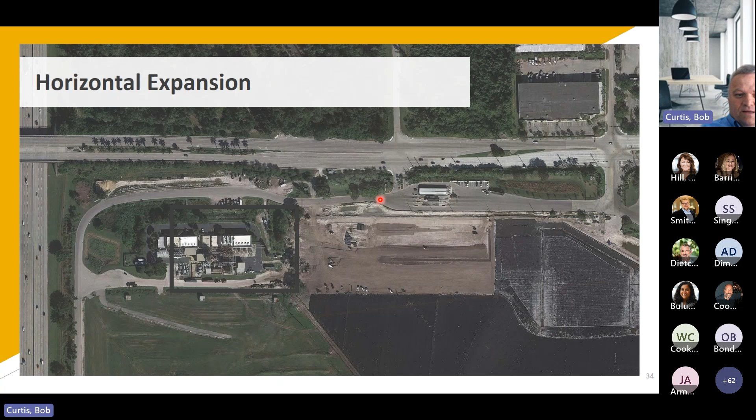So by doing this, they had to look at several options. They wanted to maximize the footprint, but they also had to look at the fact that they were concerned about the climate. By not building a new landfill or relocating your landfill, you're not cutting down trees or destroying wildlife, and that's a benefit. The cost would be lower for design and permitting to use the current landfill, as well as the construction cost. You can use the existing leachate collection system, scales, and ponds.

There's convenience involved with this as well, that the traffic flow is established. Everybody knows where it's going, so everybody's used to it right now. And then that leads to the NIMBYs, the not in my backyard folks. So you don't have to battle them if you're permitting a new landfill.

And again, I had a statement: nobody plans to fail, they just fail to plan, but sometimes you have to adjust as you go along. With that, I'll complete this part of the presentation. And are there any questions?

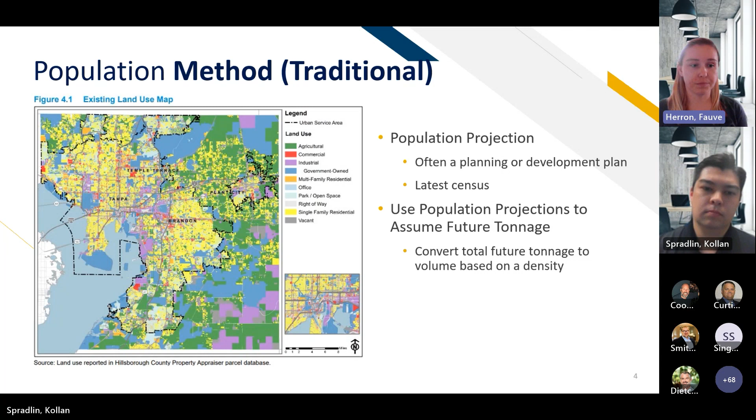So the population method is dependent on the waste generated per capita, or tons per person, within the service area. That is determined from the population as well as the tons that go over the scale year over year, back to your scale receipts and the surveys you do annually.

But it can also be variable if your population increases due to urban sprawl, due to development into agricultural areas, or just a large influx of people, like Florida saw after COVID and everything that happened here. So you can also change that to be 2%, 3%, or even if people moved out, you can move it down to 1% or 0.5%.

And these changes allow the solid waste management system to understand how the waste is changing and how they can project out these changes throughout the years until they reach their final capacity.

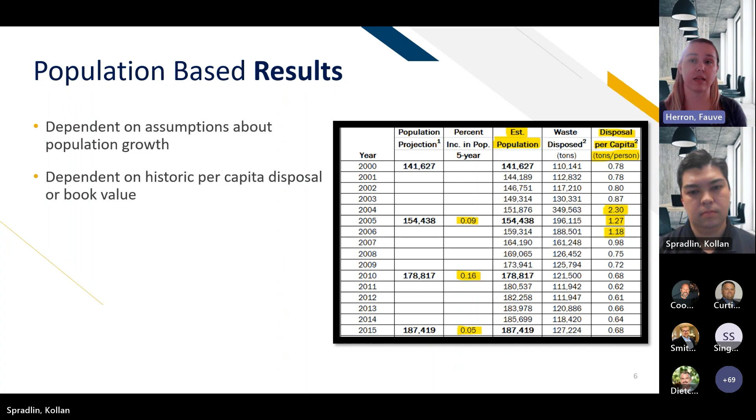Hey, thanks Fauve. Yeah, as Fauve talked about, that's kind of the way I've seen a lot of site life estimates and modeling calculated, and to me that's the traditional method. I'm sure there are many other methods out there. One I want to talk about today is the remaining capacity method. It was developed a number of years ago by Bob Stearns, the first S in SCS. It's basically going to be contradictory to the population-based method—it eliminates population completely.

Generally as an industry, as municipalities, solid waste departments, and operators, we're not as interested in counting people for the sake of counting people. It's usually with the implication of tying that to some other piece of data, usually tonnage or volume. So this method consolidates some of those variables and says, we don't even care about population. What we really care about is the volume consumption trends we've seen in the past, and then how we're going to project that into the future.

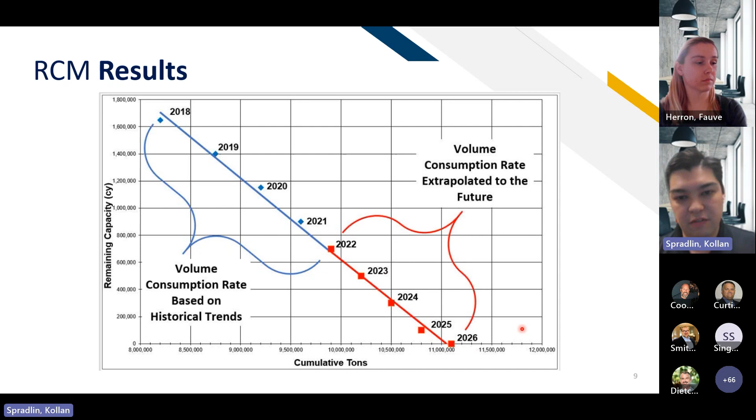So as with all models, there's not really one method better than another. The quality of it really depends on the quality of data you put into it. It can be more or less conservative. What we're trying to do with this model is eliminate a lot of variables. As long as your projected future filling and operations are fairly similar to the last 3 to 5 years, we're able to project that into the future.

Once we start adding in other variables, it gets a little more complicated and maybe a little less accurate. As with all models, it's predictive—it's going to get you in the ballpark. I can't tell you today the exact date your landfill is going to close 20 years from now. I think that's a reason why these are updated each year, in order to track changes as we see them on a year-to-year basis.

Some of the things we do to make it easier for clients to understand is address the fact that we've seen a lot of bad surveys recently. I think a lot of surveyors are very busy, and it's imperative to get a high quality survey, because you can't really do a whole lot with data that is incorrect.

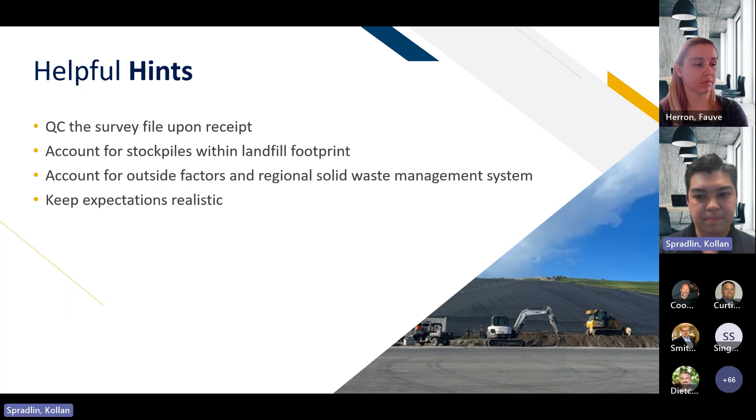So we try to do a good job of predicting, and can certainly change the way we're calculating things in order to rectify instances where we think we're not calculating it appropriately in the past, but it doesn't actually create or lose landfill life. I could talk about site life for a long time.

This is basically condensed from an hour and 15 minutes down into 15 or so, maybe 20. So feel free to get in touch with us or shoot us questions in the chat, and I'll be happy to answer them.

Next, we've got Stephen and Laila talking about methane mapping.

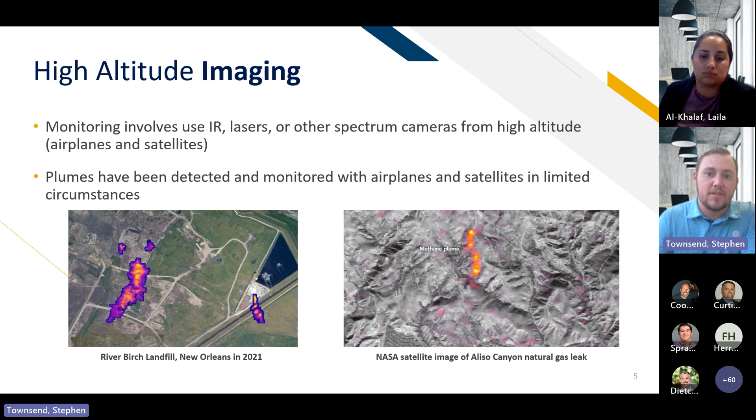To provide some limitations of high altitude imaging: using this technology for regular monitoring events, such as a quarterly SEM, would be far too expensive. At this point, they're primarily a research tool. Smaller, well-controlled landfills may not really even be detectable. And the influence of background levels really hasn't been shown, but that obviously will have some type of influence on your high altitude imaging.

To provide some examples of high altitude imaging, NASA Jet Propulsion Laboratory used aircraft methane data to estimate methane emissions. California Air Resources Board is continuing to work through this scientific aviation, and the board is also deploying their own methane satellites in the future.

Some other examples of high altitude imaging include Carbon Mapper, a company that has set its sights on methane and CO2 mitigation. They've been performing airborne pilot tests, flying over different facilities that typically have high methane or CO2 emissions associated with them. They originally conducted tests in California, but we're starting to see more flyovers in the Southeast United States, specifically Florida, Texas, and I've seen them in Georgia, Alabama, and Mississippi. More of a focus on oil and gas, but landfills are definitely starting to pop up and we're seeing sites get flown. They're working on comparative methane studies using known release rates and detections, and they have plans to launch a constellation of satellites in the next few years.

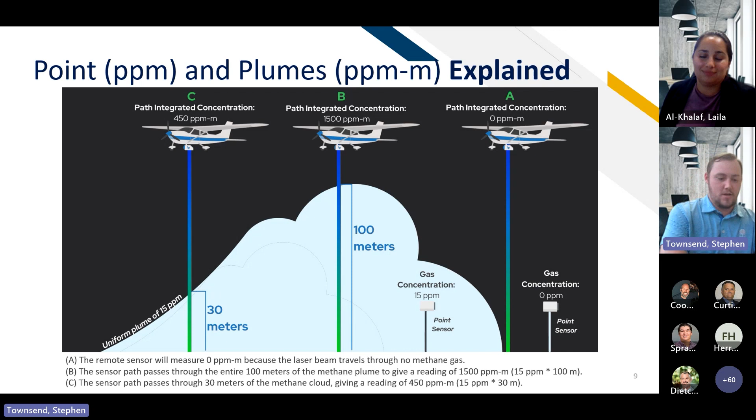And so Laila is now going to talk to us about low altitude and drones.

So the device uses the same technology that a high altitude imaging device would. The monitoring involves use of infrared technology, lasers, or other spectrum cameras to actually see the methane emissions from landfills. The device is a tunable laser diode, tuned only for methane. The detection limit ranges between 1 to 50,000 ppm-m, so again, those are the same units that Stephen just touched on.

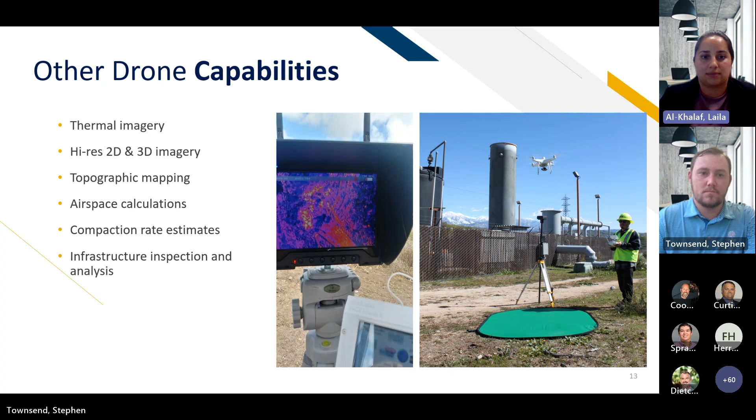Next up we have landfill surface testing, so primarily surface emission monitoring. We're going to go through a couple different options here.

So basically you have that handheld device. It emits a laser, and that laser is then consumed a little bit by that methane plume, and whatever is reflected back into that device is converted to an electronic signal that carries that information, and it is able to now deduce a methane concentration.

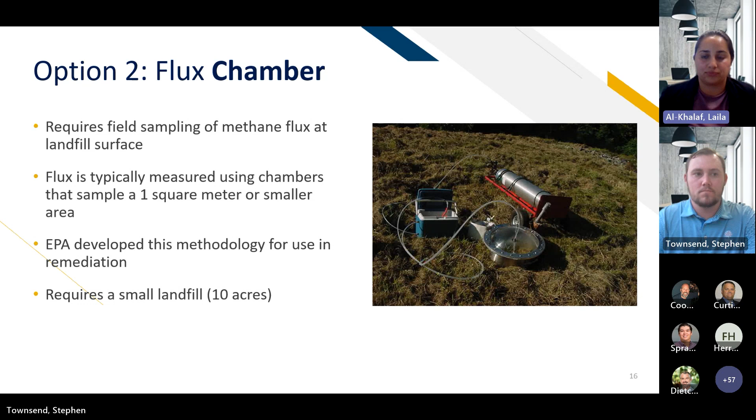What we've seen most recently in the past two years is that EPA has added another compliance point. Not only are you required to monitor the surface of the landfill itself, but you're also required to monitor penetrations - any kind of object that passes through the landfill and touches waste. Just to recap, any reading greater than 500 ppm of methane is an exceedance.

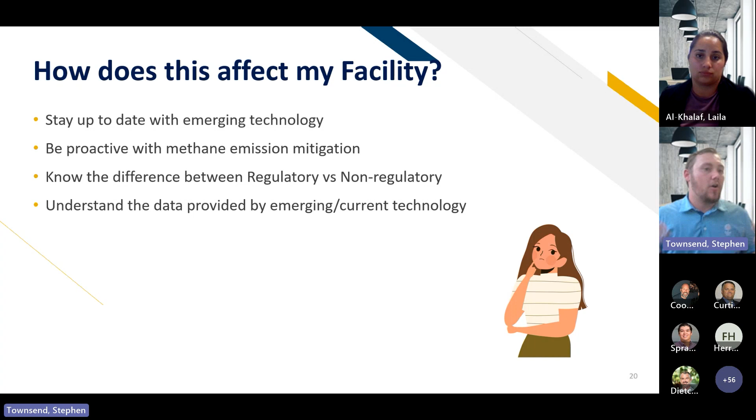Finally, how does this information affect my facility? We wanted to provide more information about technological advances that impact our industry to ensure you're up to date. As discussed on the last slide, we want everyone aware of what methods are required by rule, and aware of the data provided by high and low altitude technologies, specifically the topic of ppm versus ppm-m. Ultimately, our goal is to ensure our clients are proactive in understanding methane emissions and steadfast in methane mitigation. We feel all these technologies work together to achieve that goal.

With that, please provide any questions in the chat, and thank you for your time.